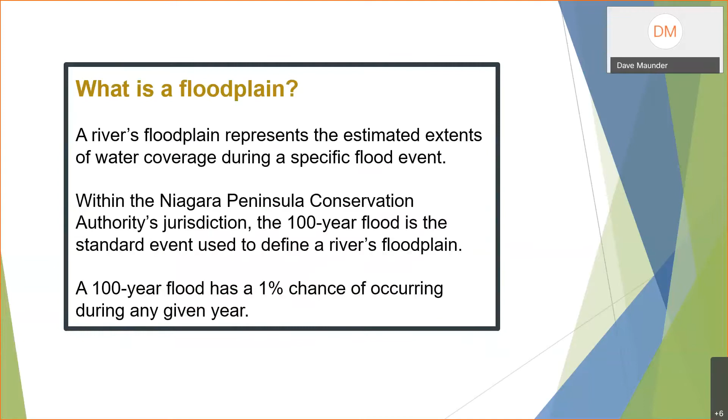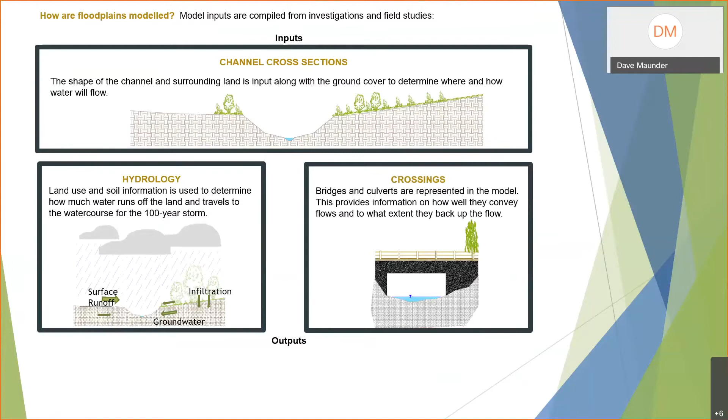If you took a vertical cut through the earth, you'd see the channel and what's referred to in green as the floodplain banks. When it rains in a rural area, a lot of water actually infiltrates into the ground or is taken up by trees, but the remaining water gets to a stream. In that stream, for a given amount of water, depending on how wide the channel is or what type of watercourse crossings we have, the water will rise to a certain elevation.

So basically, the floodplain at each location within a computer model provides the water surface elevation for the 100-year event. If you're inside the regulated flood line, you're called to be within the floodplain, and if you're outside of it, you're outside of the floodplain.

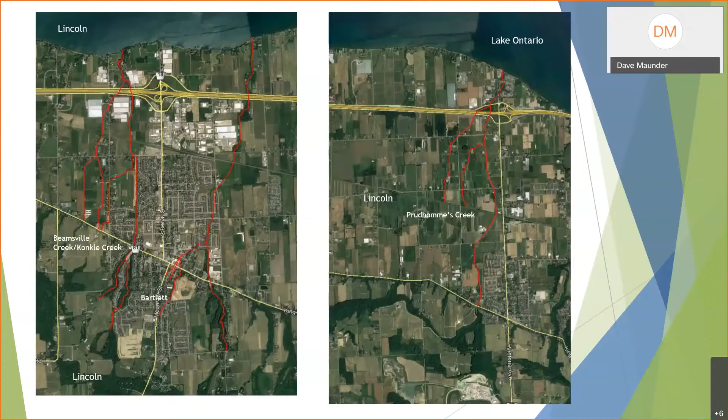As was mentioned, we're looking at Beamsville, Konkle, Bartlett, and Prudhommes Creek tonight. What I'm going to do is spend about 20 minutes walking through some of the technical aspects, but I want to save at least 10 minutes at the end to refer to individual properties, sites, or locations that may be in the floodplain, and show you what kind of measures can be done to remove or potentially alleviate flood problems within the floodplains.

So what did we do? We undertook a lot of field work to make sure our findings are reasonably founded. Then, as Glenn mentioned, we run a hydrologic and hydraulic model. Hydrology is the science of determining how much water is at a given location, and hydraulics is, for that given amount of water and the stream cross-section, how high does it rise?

Why do we want to know this? Well, there are roadways that would hopefully be dry for smaller events and even for relatively larger events. But if structures were built a long time ago and they're undersized, chances are they may back water up. And as you'll see in some of the locations, in some cases the buildings are just built very close to the floodplain, so they will be flood susceptible for the 100-year event.

Once we've identified the problems, we want to look at recommendations to mitigate the impacts of flood hazards on roads, buildings, and structures. And then, near the end, we've put together a preliminary cost to implement the proposed works.

These works could be implemented by the municipality over time, in part by the Conservation Authority, and in some cases individual homeowners may need to put some money into it.

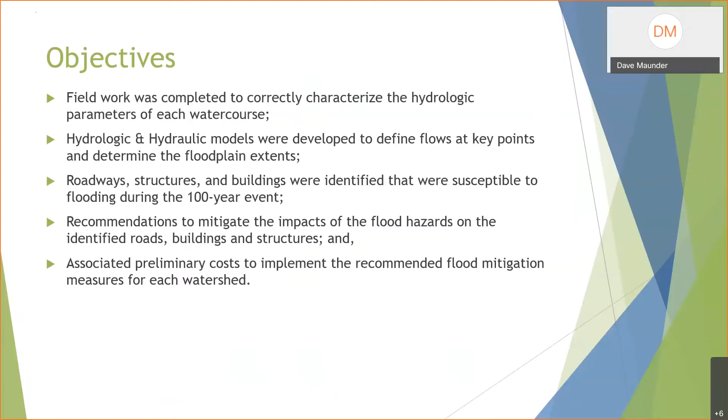So I mentioned before that there's basically six tasks to this. I'll just go over the initial tasks. We're just looking at a representative stream in the area. What we did is we went into the field, we looked at structures, measured the size and cross-section of the structures, their location, and we took cross-sections through the channels to make sure the information from tasks one and two are representative for the hydrologic model.

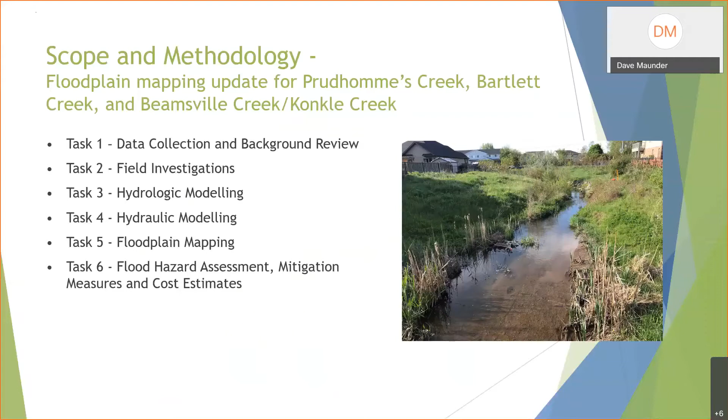Then what we did is once we have the flows at a given location, we figured out the water surface elevation. Ultimately, our deliverables are a series of floodplain maps, together with a recommendation for how we can mitigate floodplain issues wherever possible.

Just a representative example, if you look at this - I won't get into too much detail - what we have here is a representative channel, and at the downstream limit we have a relatively small culvert. So what we're trying to do is figure out when it rains, does the water stay within the channel? Does it overtop into the banks? Or does it overtop onto the roadway first?

So what we did is we actually went out and documented relevant information for each of the structures that are within the watercourses.

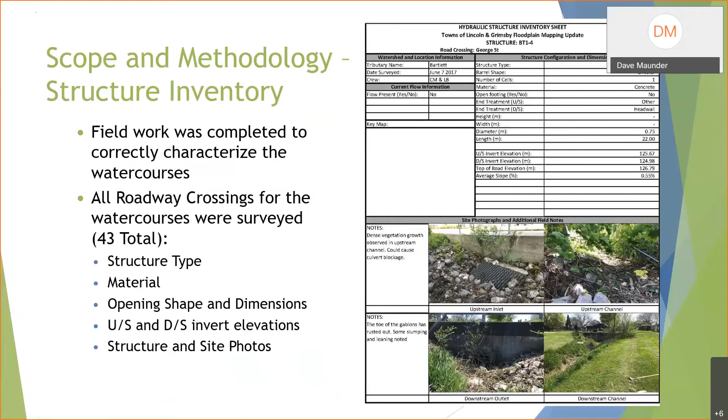We mentioned before that we used a hydrologic model. Basically what we're trying to do is estimate flows for a 100-year design storm. We also estimate flows based on existing conditions, but within most municipalities they have an official plan - in this circumstance for the year 2031. So we want to figure out what the floodplain is now, but also what it is for the future. The primary reason is that as development occurs, typically there's more runoff coming from those properties, and therefore the floodplain may increase.

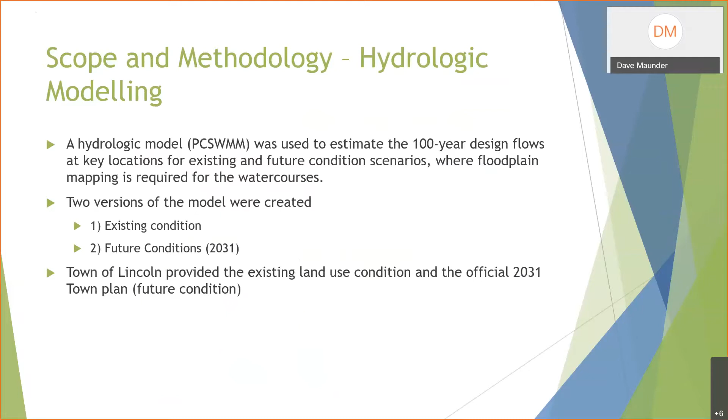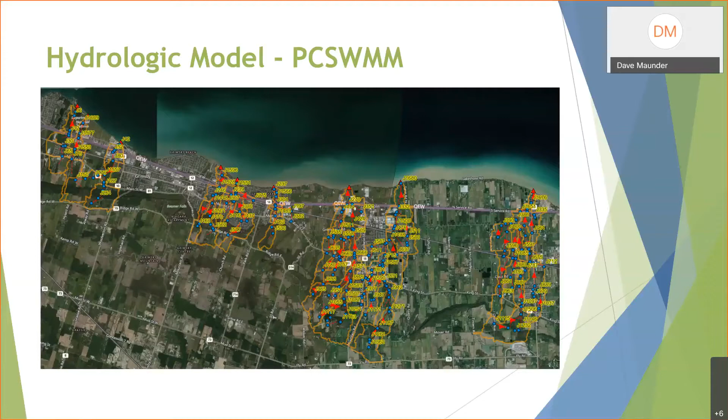What we wanted to do, you see a bunch of blue dots - all we're trying to do is define flows at different locations. Clearly in the headwater areas you won't have nearly as much flow as you will toward the mouth where they discharge to Lake Ontario. So we need to define at a variety of locations what the flow rate is, and then we input that information into the hydraulic model.

So what we've done is shown a snapshot here of some of the flows. I just want to explain what some of the values are. We have the watersheds - Prudhomme Creek, Bartlett Creek, Beamsville, or Konkle - and what we have here is a 100-year design flow. CMS is a cubic meter per second, so it's a rate of flow we're looking at.

So in 1989, I'll use Bartlett as an example - what they found is the flow rate was about 25.1 cubic meters a second, and under ultimate development that flow was about 34.6 cubic meters a second. The 1989 ultimate conditions are pretty similar to what we'd have for existing conditions now, given the 30-year time lapse. You can see here our flows of 32.7 are very similar to the original flows that were done.

Steve's going to talk about the implications of this study being done some 30 years later and how it may change and revise some of the floodplains we've been using for years. Again, these numbers aren't precise - they're rounded to one decimal place, but you're happy if your values are plus or minus 20%. Again, we're trying to do them for existing conditions and for future conditions.

So you'll see in Bartlett that once development continues on, there will actually be a higher flow, which will result in a higher floodplain or more expansive floodplain.

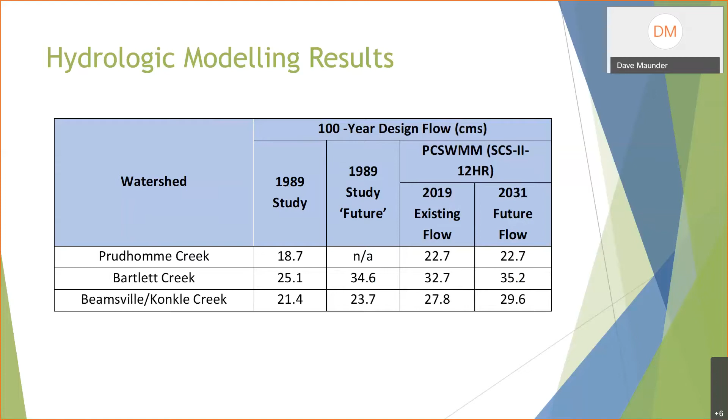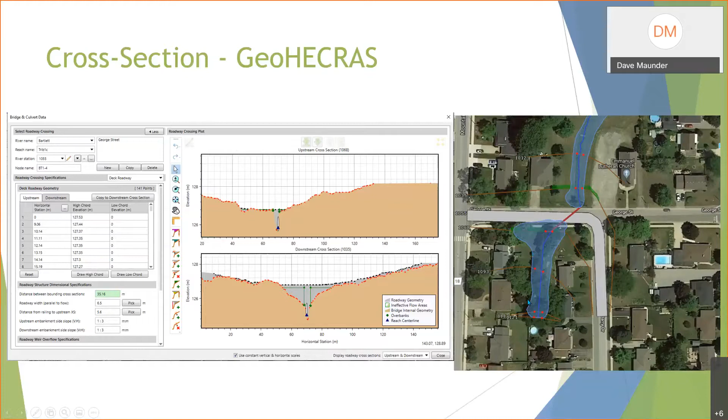At any given location, we look at the flow rate and how much the water backs up, and then we define the flood line. We define them at strategic locations, and then form a continuous line by interpolating between the different locations.

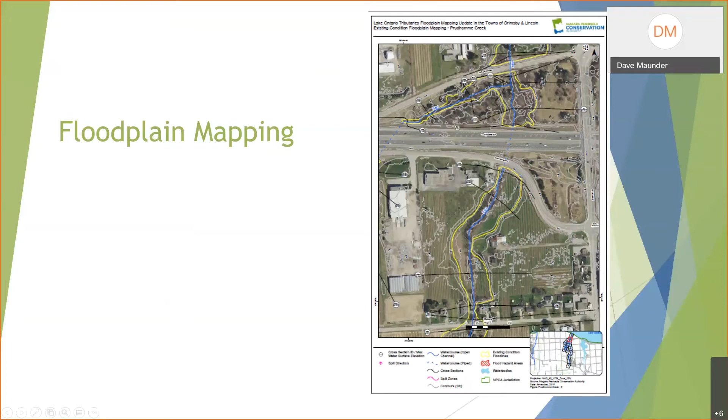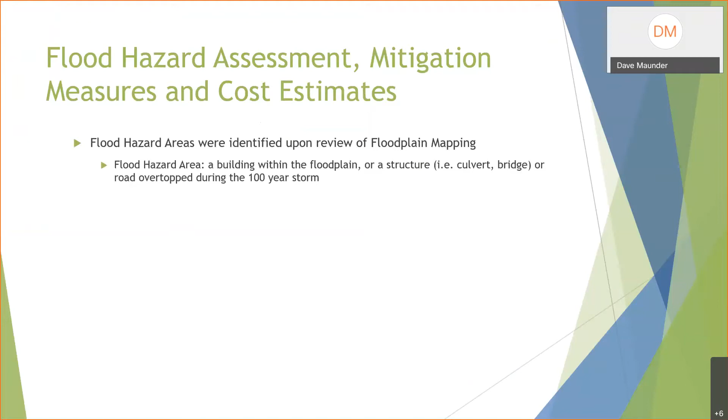So what we did, as you'll see in a moment, is identify a number of flood hazard areas once we completed the floodplain mapping. A flood hazard area is a building within the floodplain, or a structure, culvert, or bridge. If there's a building in the floodplain, we'd like to know where it is and its frequency for flooding. We also want to help municipalities determine whether culverts or bridges are appropriately sized, and if not, what the implications are and what can be done about it down the road.

So we looked at alternative flood relief options and evaluated a number of them. The first is structural floodproofing, typically done by individual residences — this could be providing a berm, regrading around your property, or blocking off low openings like window wells in your basement in case of a large storm.

What the municipality or conservation authority can do is try to upgrade a culvert. If a culvert is, say, 1 meter by 1 meter, maybe it has to be 1 meter by 4 meters to allow more water through it. If it allows more water through, hopefully you'll reduce the water that's behind it.

You can put in a dike or berm, or improve the watercourse itself — if it's limiting in capacity, you can widen or deepen it. You'll actually see in our examples there have been two recent watercourse improvements that will both reduce the floodplain and take some properties outside of it.

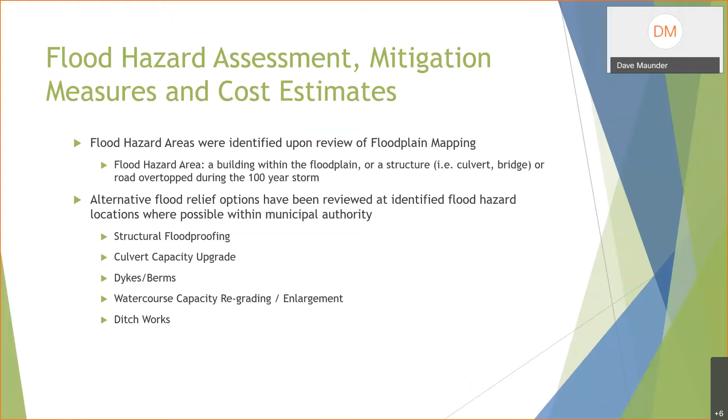In this particular area, we have 23 flood hazard areas that were identified in the streams as mentioned. We found we could recommend 12 flood remediation works that would address 14 of the flood hazards. Doing the math, that means 9 properties will still remain flood susceptible — we just couldn't find anything within the public domain to reduce that. So we'll talk about structural floodproofing by the landowner for those remaining 9 properties.

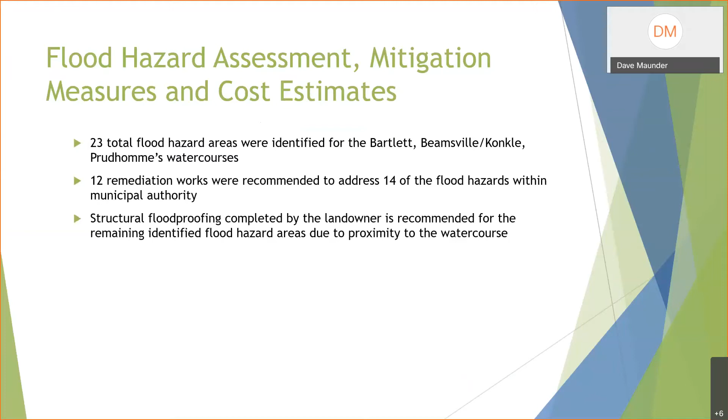So I'm just going to quickly walk through, in about the last 10 minutes, what we've tried to show here. I'll just take a moment.

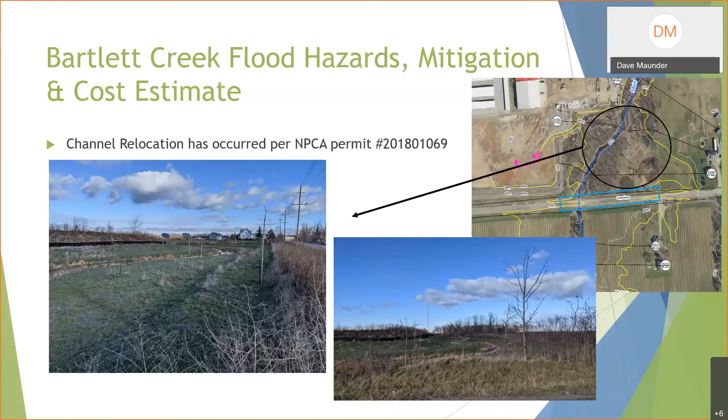So at Bartlett, again, a lot of the recommendations are just increasing culvert capacity. In this one here, what you see in red, if you see a number B4, I mentioned before there's 23 buildings that are flood susceptible, so this is one of them. In this area, what we've talked about is increasing the capacity of this culvert here. You can see it's about 6 square meters now, and we have to increase it to about 14 or 15 square meters. The wider the culvert, the more water that will get in for a given elevation.

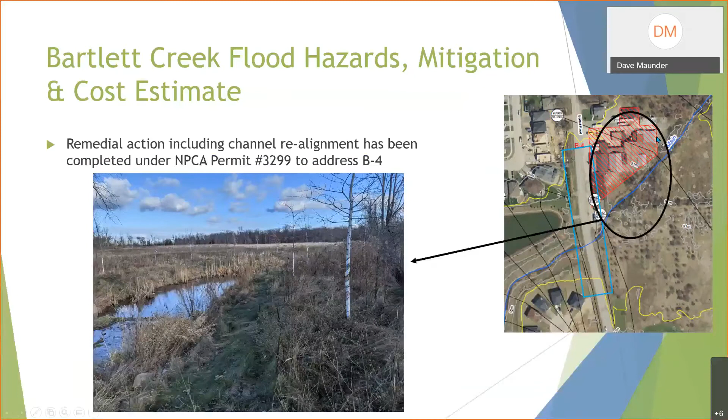And there's a cost there of $330,000. Similar to the other area, this is after our study was completed, the flood line has been brought in, and the intent is to bring it in to about this proximity here and here, by expanding the channel width such that this structure here, this building, will no longer be within the floodplain.

So again, we have one at John Street, and it's the same issue, undersized culverts. For those who might wonder, a lot of these culverts were built many years ago. The standards have increased, so probably if the same culvert was built today, it would be bigger, wider and deeper in all likelihood. Also some of them were built before urbanization occurred upstream. So those are the two basic reasons why the culverts, when originally built, may not have been large enough.

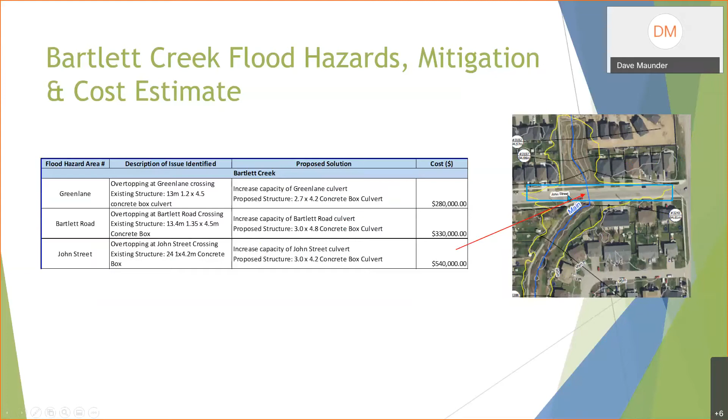So again, what we have here is an increase in the culvert capacity for John Street. Some of these are fairly similar, so I'll try to speed up through some of them. At Acres Trace, again, a small undersized culvert.

What we have here now are structures that are upstream of a culvert, where water backs up upstream. So these two structures here, you'll see later on, there was nothing we felt we could do in the stream or upstream that would take these two homes outside of the floodplain. So there would have to be structural measures done there. You'll see those measures at the end of the presentation.

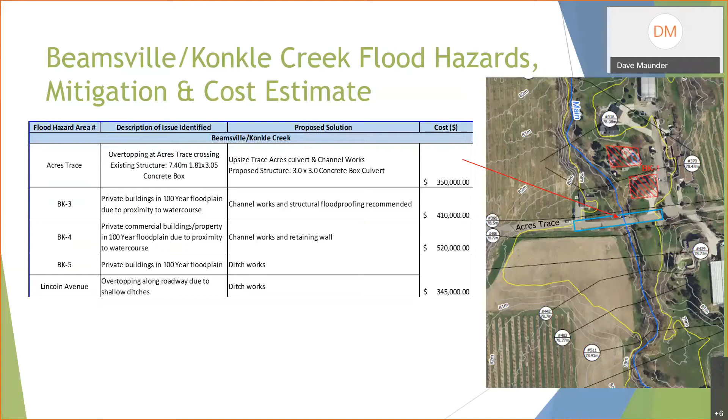So there are some locations where there are private buildings, and we thought, for example, where you see BK3 here, so these two buildings, we did feel that there was an opportunity, as you saw on a couple of those previous slides, to widen or deepen the water course and take these two buildings out of the floodplain. So channel works with some structural floodproofing would remove, in some cases, these two structures here.

What we have here is a partial retaining wall and a poorly defined stream, along with a building and a long, large parking lot that's in the floodplain. There's not much opportunity to increase the channel width, but possibly a retaining wall or similar structure could be put in to bring this property and associated building outside of the floodplain.

In some of these areas, we're literally looking at a ditch running along the road, and as you can see, it's very undersized, so the floodplain becomes very wide. What we're talking about here would almost be operation and maintenance works done by the municipality, but there's the possibility of improving the capacity of this local ditch. If we did that, we could remove these two homes and take them outside of the floodplain.

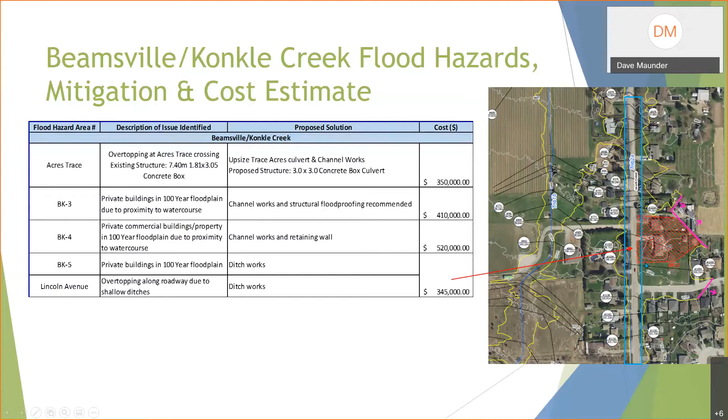Again, we're looking at Laurie Avenue. What we have here is an increase—if we can increase the size of this, we'll bring this floodplain in. We refer to it as property P1. As you can see, the flood line is running through the middle of the house. We'd hope to bring the flood line in by increasing that capacity so this house would be outside of the floodplain.

We mentioned another location on Greenlane Road—I'll go through a couple of these quickly—that's overtopping at Greenlane, so again another culvert increase. And at Rittenhouse Road, the same thing. In some cases all you're doing is bringing the floodplain in, but in this case the hope would be to put a large enough culvert in that these two properties, these two homes, would be taken out of the floodplain.

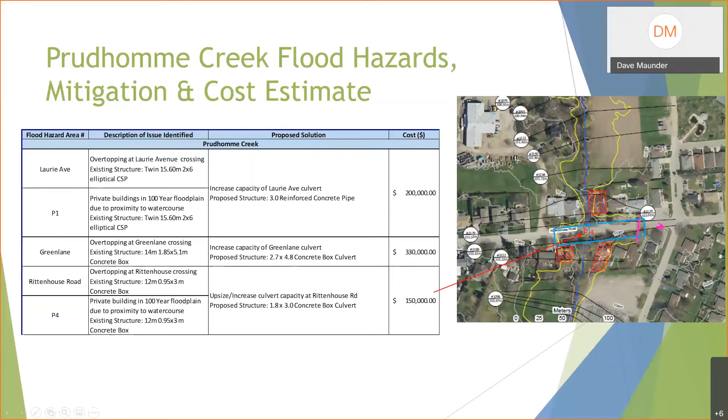So the last couple of minutes I have are just to talk about this. We had 23 properties identified. I did identify one where works have subsequently been done since we finished the study. There were 9 properties where we didn't feel anything could be done by the municipality or public works, just because we didn't feel we had the room.

For example, look at these two homes here—they're just very close to the stream. There's nothing we can really do to bring that flood line way over here so these two properties would no longer be flood prone. So what we're talking about here is structural measures. I think it's probably best if there are questions, Steve would address those, but the structural measures, as I said, you might try to put a berm in and around your property. You need to be careful that you don't inadvertently impact somebody else.

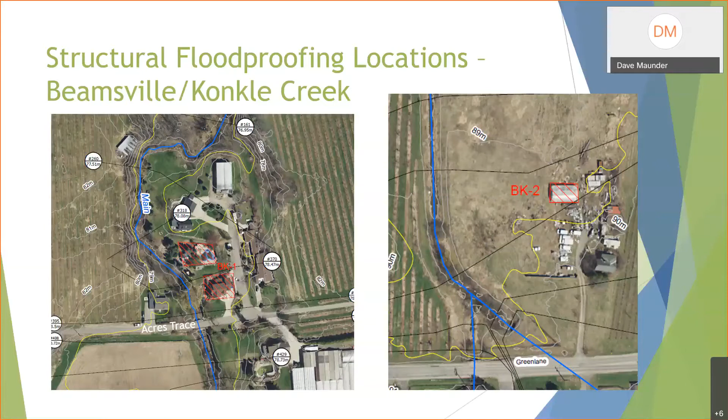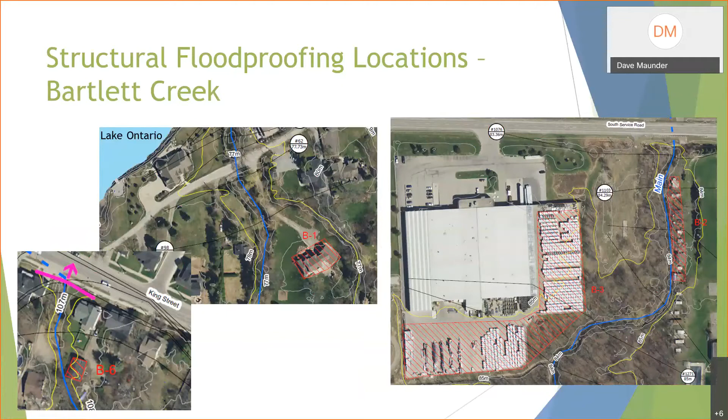Then there are a couple of industrial properties—not so much the building itself, but all the storage locations and the parking lots. It's different because you can allow some flooding in a parking lot. Typically there's 20 or 30 centimeters before cars are damaged, as long as the velocities aren't too significant, so there are different things you can do in parking lots and different regulations. For the last couple I have, here you can see the stream, and the house or building is directly adjacent to it—same thing with this one over here.

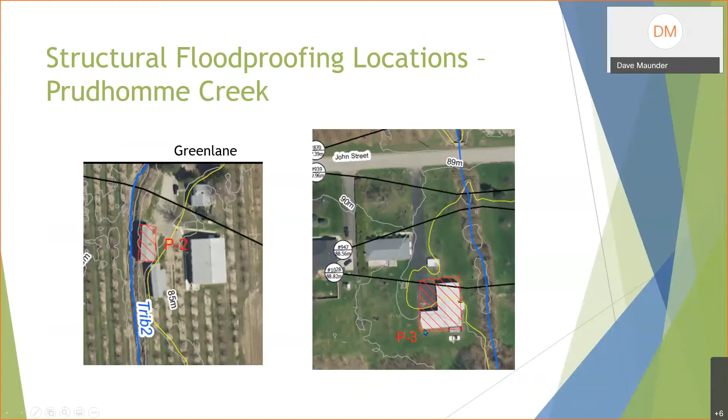That's all I have, and I'll turn it over, I guess, to Steve. Yeah, we'll pass things along to Steve. It's Glenn here again, the independent facilitator for the meeting.

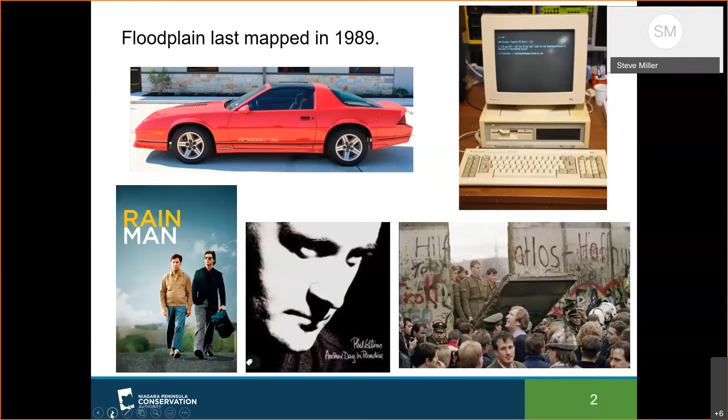All right, let's start on the west side. Beamsville Creek is also known as Konkle Creek. It has two names.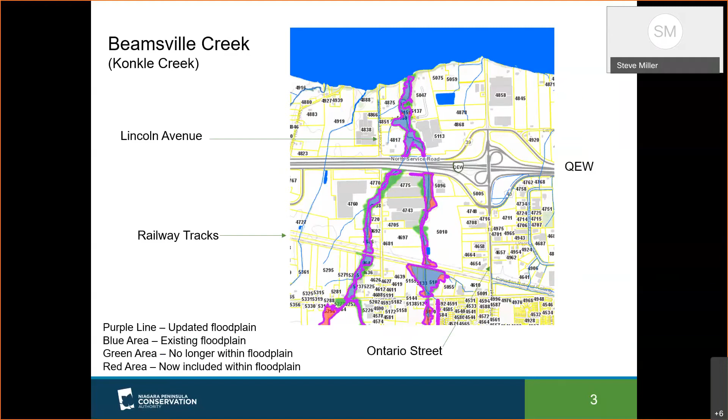Let's head upstream. Okay, Lincoln Avenue - Dave talked a little bit about this. So Lincoln Avenue between Greenlane and King Street - this whole area was built on a snooker table. You take a snooker table and tilt it up so everything flows to the top of the screen, flows north. That's what we find happening here.

The old 1989 floodplain showed that stuff was going all over Lincoln Avenue. It was all over the place, much like we find today.

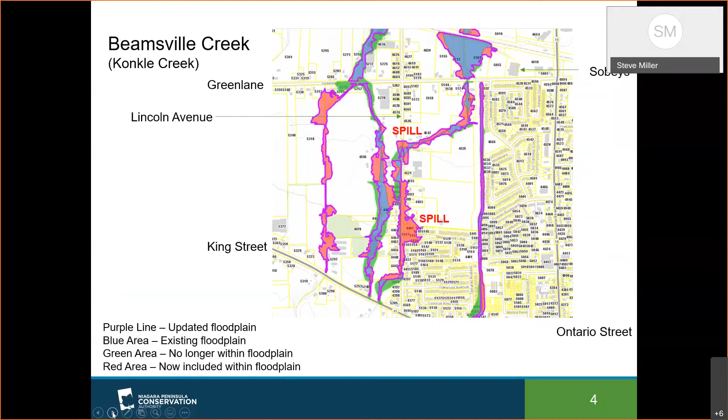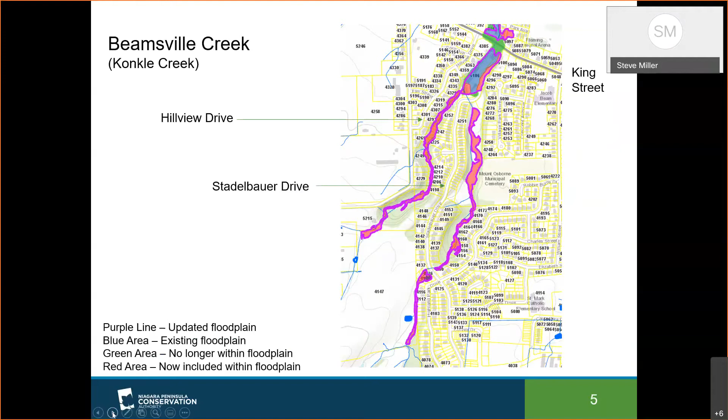Moving on, proceeding upstream again - the old 1989 floodplain mapping stopped just upstream of King Street. We've extended it down the tributaries that run adjacent to Hillview Drive and Stadelbauer Drive. They're showing up red, but typically these floodplains are contained within the valley systems. The folks living around Stadelbauer and Hillview know this - you've got deep valleys that these floodplains are typically contained in. So even though we've mapped them, there's no real impact to the adjacent structures.

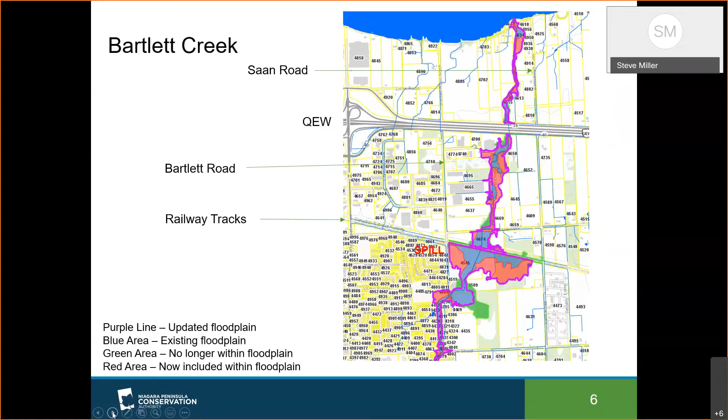Let's take the next slide, walking upstream. We can see one of those areas that David mentioned where the watercourse was realigned with approval from the Conservation Authority.

We start going through the lands around Dennis Avenue, and we see not really a lot of change. That's not surprising, because that subdivision was designed with the 100-year floodplain in mind to contain that. And we see, again, typically, the updated stuff is in conformity with the older '89 stuff.

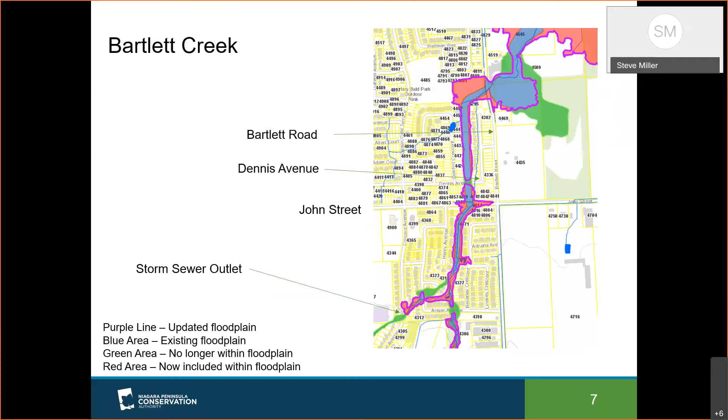We've extended over the old '89 floodplain mapping the extent of our work upstream. That's why you see the big red lines kind of heading to the bottom of the page. Those are tributaries that hadn't been afforded floodplain mapping before, mostly in areas that hadn't been developed, although in the west around Hixon Street, we see that the floodplain mapping is routing through backyards. We know that — that's been a historic area that has historically experienced some form of flooding or another.

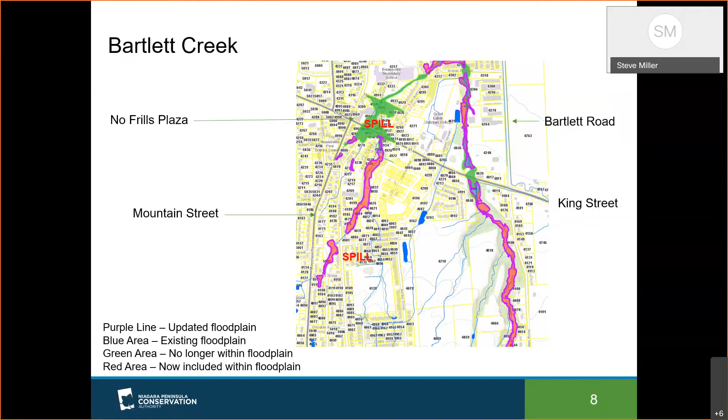And again, we see the spill areas, especially the floodplain in the extreme kind of bottom left, spilling up, running north on Hixon Street. Let's just take a look at the next slide.

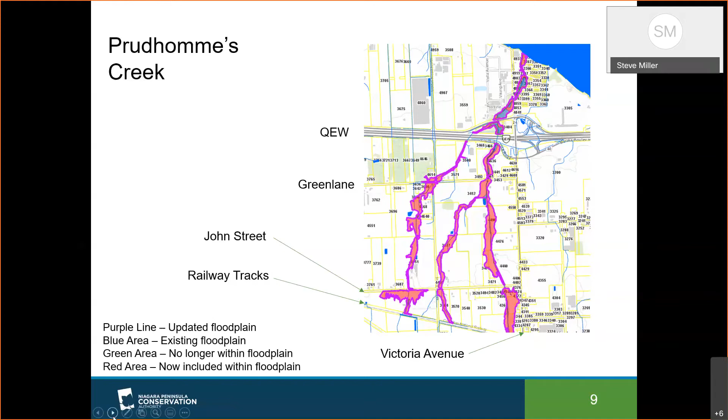So heading upstream, once again, railway tracks, as railway tracks tend to do, form a bottleneck. We see on both sides of the main branch the floodplain spilling on over on the east side to Victoria Ave, and to the west, kind of in the agricultural lands that border the railway tracks.

We head on up further King Street, Rittenhouse, just north of King Street. Things are generally the same as the '89 stuff, and Rittenhouse is one of the areas that David mentioned. I know the town has been working with the Conservation Authority, and the work that Dave's team has done to replace that Rittenhouse culvert — they know about those houses that are impacted on either side. So hopefully the work that the town has already undertaken will go a long way towards alleviating that situation.

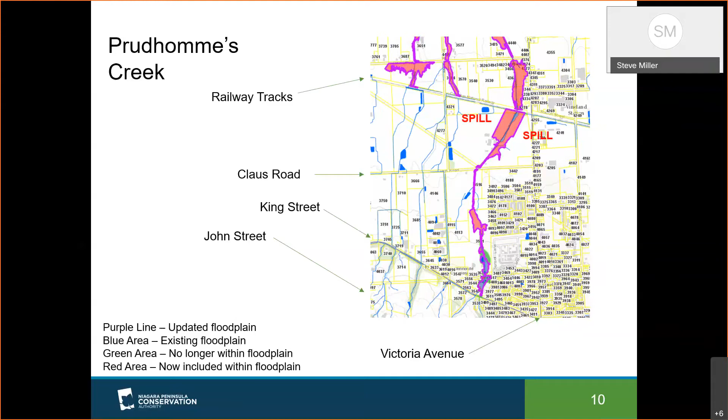So we went through this at a high level. Folks, I encourage you, go to the website. You see Glenn gave you the website — there it is there.

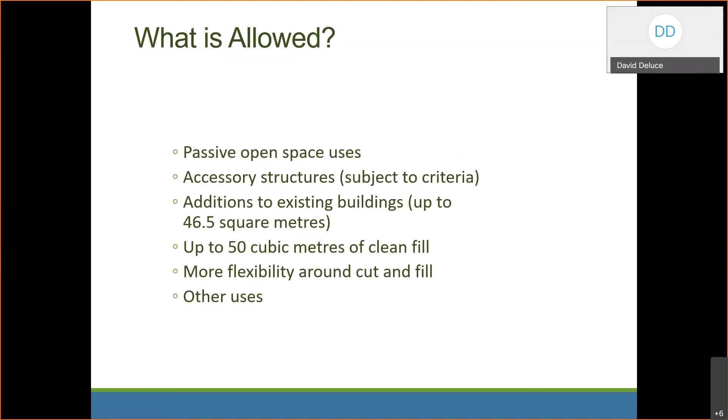And kind of in the reverse fashion, this is another catch-all - if there's a use that is detrimental to the floodplain or detrimental to surrounding properties, or would be of a significant polluting nature, there is a policy that would allow us to reject that permit application.

Planning applications - when I speak to planning, that's referring to applications submitted to a municipality, like a zoning bylaw amendment or a plan of subdivision or a minor variance. Those are circulated to the Conservation Authority for comment. As I mentioned, we have a memorandum of understanding with the province where we provide comments on the natural hazard section of the provincial policy statement, section 3.1. So we do provide comments under that.